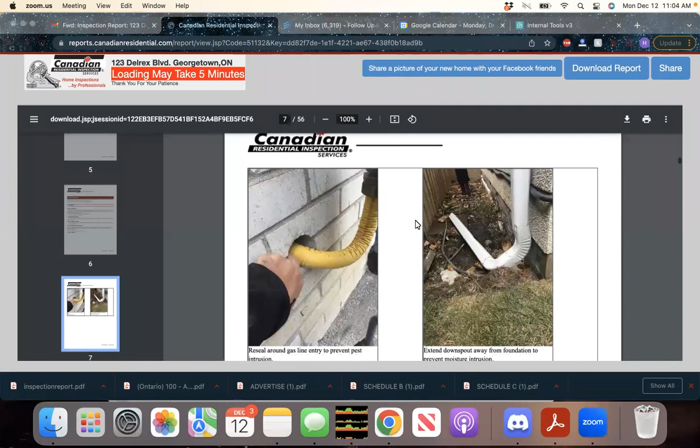Yeah, that makes sense. And also you have a note here about the surface drainage. So I guess there was a grading issue with this one where water was kind of coming back towards the exterior foundation walls. Yeah, I think on that one it was the back of the house that had a bit of a slope towards the house. We make that note because ideally in a perfect world, we'd like to see the grading slope a quarter inch per foot for the first 6 feet away from the house, and that's just going to prevent any water from pooling there. So we don't want any water to come in the basement. I'm sure nobody does, but that's the easy fix.

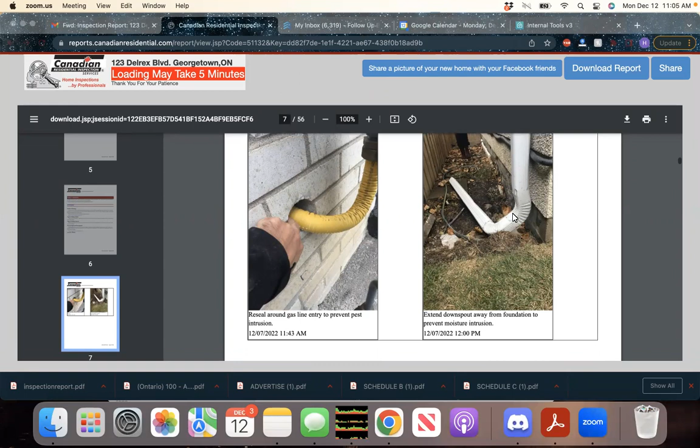It's just to regrade. And if you wanted to do a next level of protection for the basement, is there any waterproofing methods you would recommend for the foundation wall, anything from the exterior? Depending on the age of the house, there's a good chance there's already been some waterproofing done, but on older houses like this one, there was no exterior waterproofing. So you could do like a waterproof membrane, which is like a foundation wrap. You'll see it's got dimples in it, and that will essentially guard the foundation from chronic dampness and any sort of water pooling next to the foundation. Exactly, that's exactly it. So it just avoids water being absorbed into the concrete because it's porous, and it getting released into the actual basement as moisture or actual water that comes through. Right, hairline cracks are fairly normal in Canadian conditions.

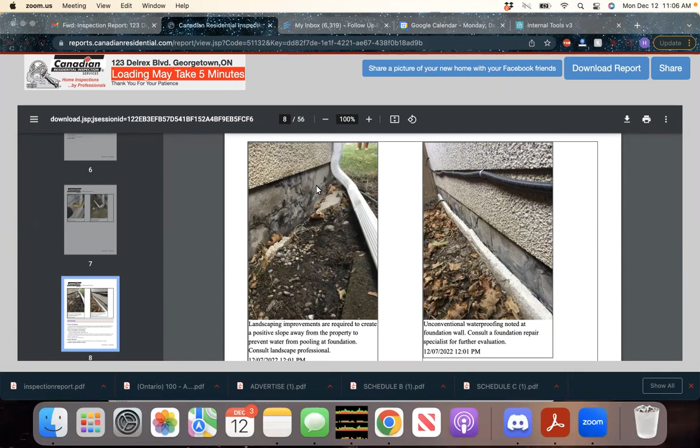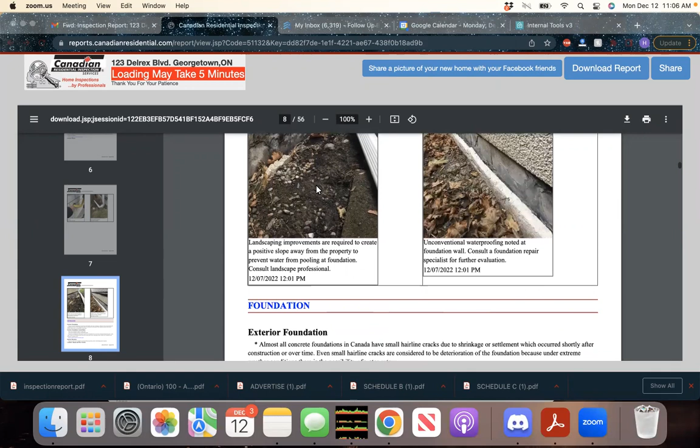But if they get too thick, there's a process called parging. Is that right, that you can use to reseal some of the hairline cracks? Absolutely. If it's just a small hairline crack, we've seen it where even small hairline cracks will allow for moisture intrusion. You're better off just sealing them up, because it gets to a certain point where you're going to have to consider doing an epoxy injection, which can be quite expensive.

Definitely. And the epoxy injection, can that be done at either side of the foundation, both on the interior and exterior, or is it just from the inside that they do it? Because I've always seen it from the inside. Yeah, it's predominantly done on the inside.

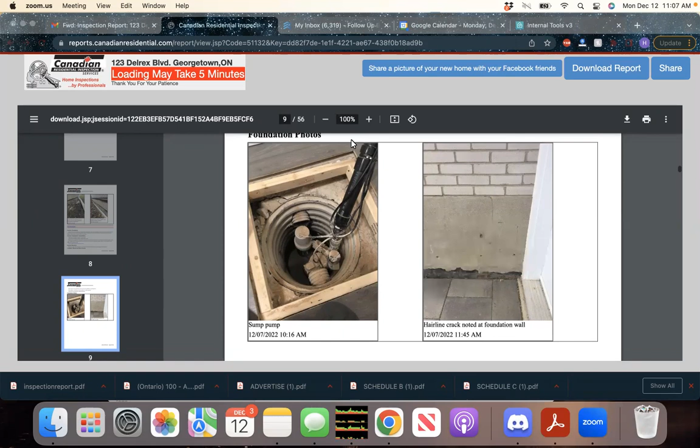They can get quite expensive, anywhere from about $500 to $3,000. It really depends on the warranty, how long it's been there, how much water is currently allowing in, and so forth. That's definitely right.

So this is the example of the hairline crack we're talking about, guys. If you do parging on this, you can see at the bottom here it's all been deteriorated. If you do new parging, this will help seal it, and that definitely has to be done every 5+ years, because weather conditions really deteriorate it fairly quickly.

Now, a couple of quick questions about the injection. Is it silicone that they inject with? What is that product they use? No, it's epoxy, which is the product. Okay, so it's epoxy, basically like a glue? It's designed specifically for concrete, and it binds it together. It's not supposed to fail, but I've seen a number of cases where it does fail, and that's where it's imperative that we have that warranty so that we can go back on the guy who did it and they can redo it.

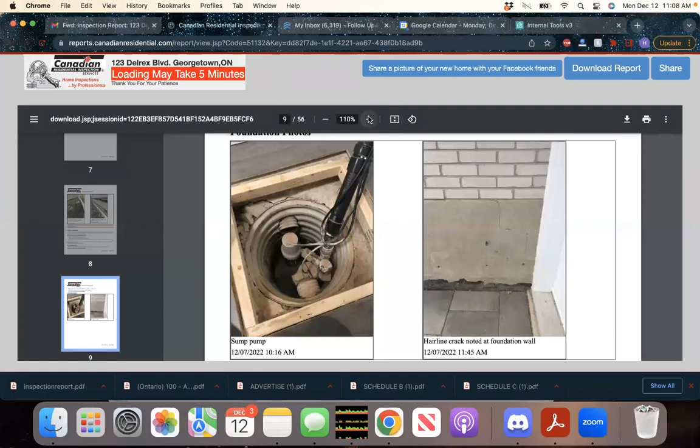That makes sense. And just a typical cost, like when you see 3 or 4 injection points in one of the cracks, what is that roughly costing a homeowner to get done? Yeah, so like I was saying, it could be anywhere from $500 up to, I've seen up to $3,000. In terms of warranty, you can get one with no warranty, or a 5-year, 10-year, 15-year, or lifetime warranty. So the more warranty coverage we have on it, it's typically more expensive.

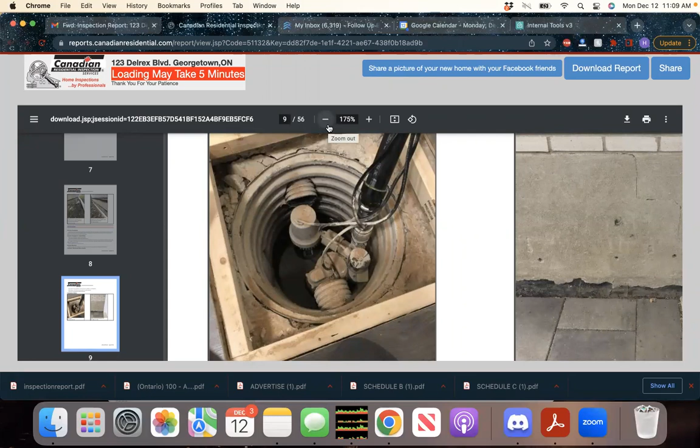Gotcha, understood. Now we've got a picture of the sump pump up here as well. For a lot of people on the call that may not know what a sump pump is, take us through what this is exactly going to be doing for the foundation. So any water that collects near the foundation is going to be sucked out and hopefully exhausted away from the house. A lot of the times we'll see it discharging right next to the foundation, which really doesn't do us any favors, because what happens in that case is we end up short cycling the sump pump.

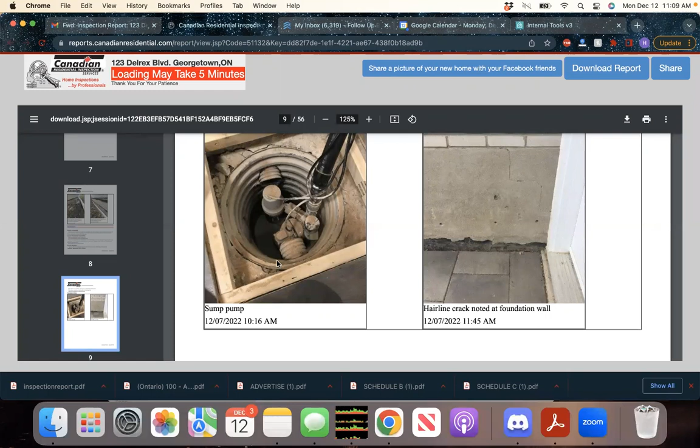So we have water that collects near the foundation. If we're taking that water and dumping it right next to the foundation, it's just going to cycle back into the sump pump and it's going to continuously run. But the idea of the sump pump is to get the water out that's collected around that foundation. So what I would suggest, if any of you see that, just let your client know that they should have an extension, ideally 6 to 8 feet away from the house, and that's going to prevent that water from pooling there.

Fantastic. And can you add a sump pump to any foundation, any property, or does it have to be roughed in when the house was being built? No. So again, with sump pumps, if you do see one in a house, it's not necessarily a bad thing. But if we see it in an older property, there's a good chance that there's a sump pump there because there was an issue in the past. People aren't putting them in just for fun.

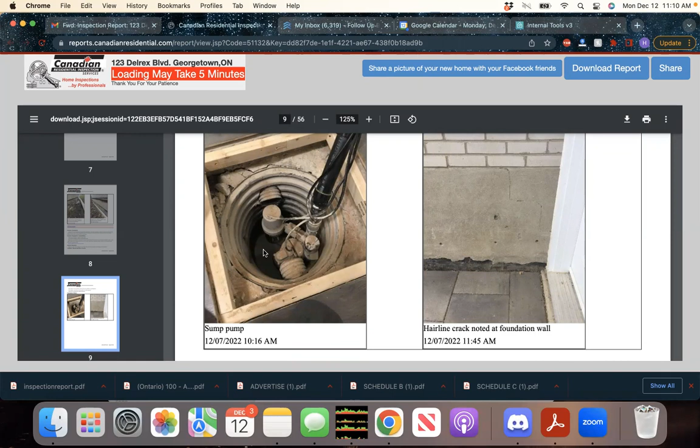So it's great that we have it there. It's one of the only lines of defense that we have against moisture intrusion in the basement. And it's a lot cheaper than wrapping the foundation in foundation wrap, doing the digging and all that kind of stuff.

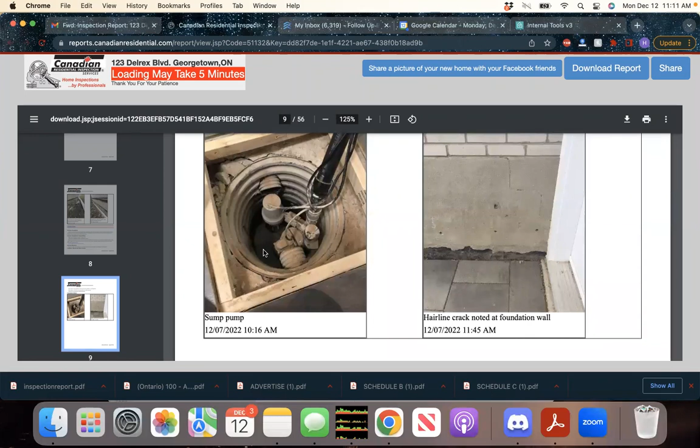So a lot of people opt into the sump pump versus doing a complete waterproofing of the basement. Gotcha, but if you did them both, it's like an extra layer of defense, right? Exactly. It adds a lot of value. A lot of people don't see that, but I think it's something that pretty much every house should have.

These things tend to happen when you're on vacation and you come back to a flooded basement. If we would have had a sump pump, there's a really good chance that we wouldn't have to worry about that kind of thing. I think it should be code, to be honest.

I agree with you, and I always tell the buyers or any homeowners, the foundation is the most important part of the house. You're gonna make all that investment onto that lower level, the basement, doing basement apartments, kitchens, bathrooms, and everything. And if it floods, you're really out quite a bit. Even if the insurance does cover it, it takes forever to get the work done again. It's just a big headache and a big distraction. So get this work done as soon as possible.

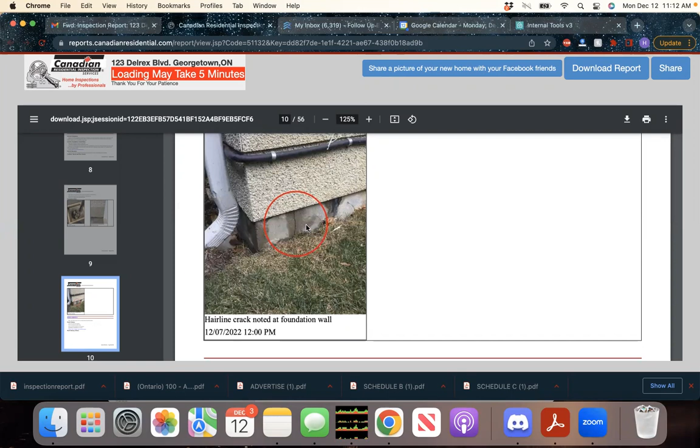I think it's one of the best investments you can do into the property is getting that waterproofing done and out of the way. And it's going to be fairly bulletproof moving forward.

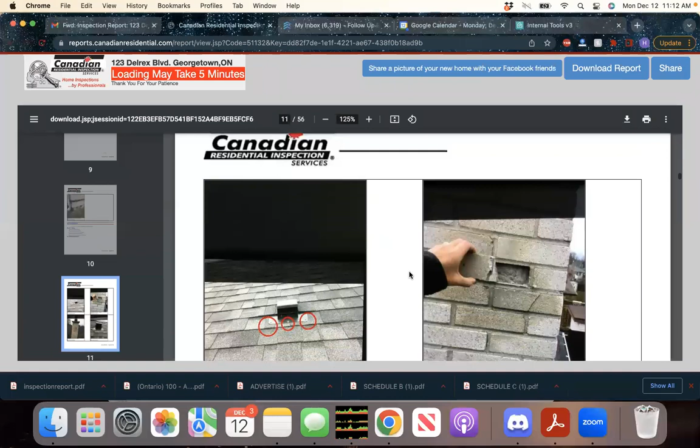Now, with the chimney here, I remember you were on the roof on this one and you had literally pulled out one of the bricks, held it in your hand. I remember that. Yeah, this was the picture right here. So you pulled out one of the bricks. So why is it important that the masonry work is intact on a chimney?

Well, we want to prevent any moisture intrusion from getting in there. That's the primary reason. Secondly, the more it chips off, the greater chance that we have of that chimney falling onto somebody in a storm or that kind of thing.

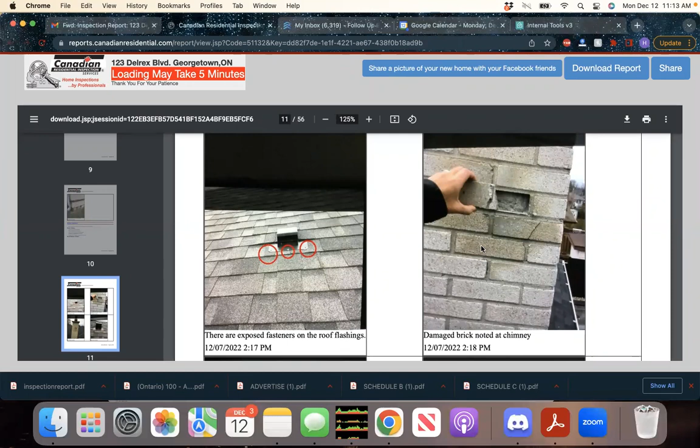Definitely. And you made a good point when you were actually talking about it and explaining it to us. You said even if there was a leak in the actual brick and mortar here, the gases coming through the chimney aren't going to actually leak out because there's another container inside there. Is that right, you were mentioning? In this case, there is, because if you look, do we have another shot of this?

Yeah, you see this one with the circle on it to the left. If you notice the top of the chimney, it's crowned off with a B vent. So that B vent is inside of that flue that you see at the top there. So there's no water that can get into that pipe. And that's not going to affect, in this case, the hot water tank.

Gotcha. Now, if it was like a fireplace, for example, that'd be a different story. It could eat at—they have clay chimney liners inside, and once the moisture gets into there and cracks the chimney liner, that's a very expensive repair. Chimney liners can be anywhere from $10,000 to $20,000 to repair.

Gotcha, makes sense. And you had mentioned the actual fasteners that they had put down on these vents on the roof—what was missing on them? There was some sort of fastener missing, I guess. So the fasteners are there, you can see the nail heads, but there was some sort of epoxy or sealant you add on top. So there's a roof sealant that you can put on top of these that prevents the nails from corroding out.

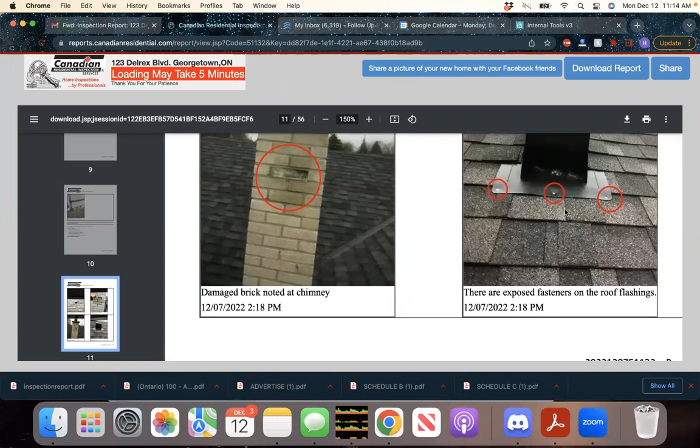And that's so basically for code purposes, everything needs to be sealed. Any penetration on a roof requires sealant.

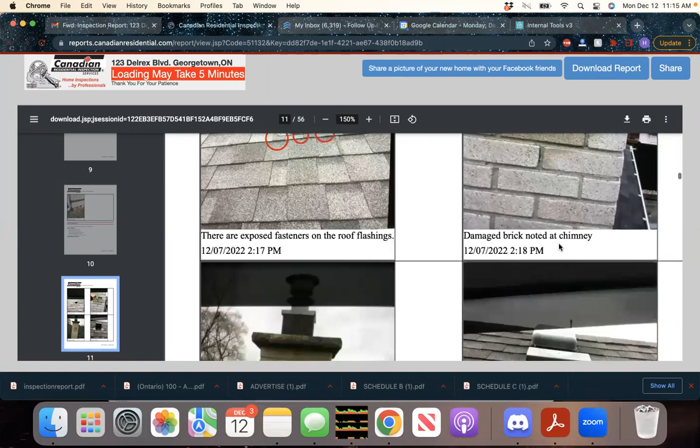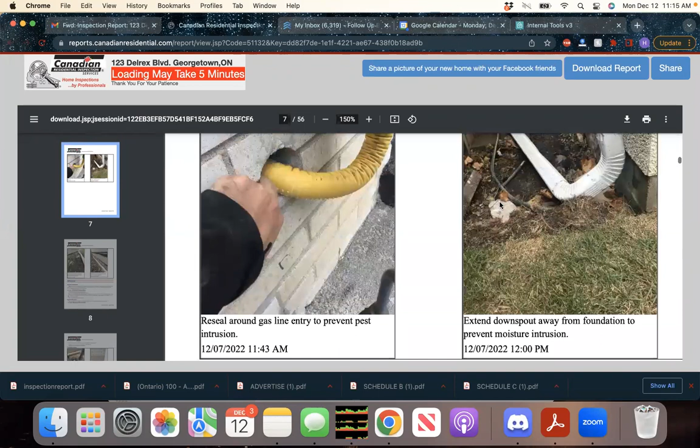Gotcha, makes sense. And there was another picture I passed by earlier that was quite interesting. Hold on, where was it? One second here—I think it was a gas line. So this was the gas line going into the house that had a major hole in it as well. So you recommend epoxying this up or silicone, or how do you fill in this size of gap here?

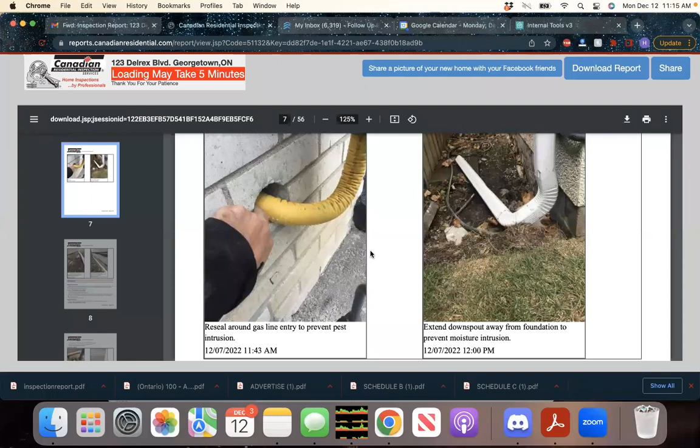So the easiest way to do it would be to spray foam around, and then you would do the silicone, or you can get a flexible sealant that they make specifically for brick. Gotcha, makes sense. So this avoids pretty much rodents, insects, water from getting in there, right?

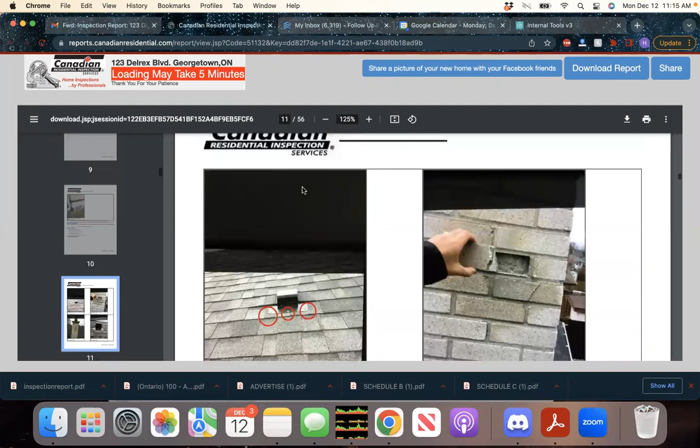Well, you remember that one went directly up into the attic. So that was just an easy way for mice to get into the attic. That's right, that's exactly right. So you can see more of the fasteners need to be sealed here.

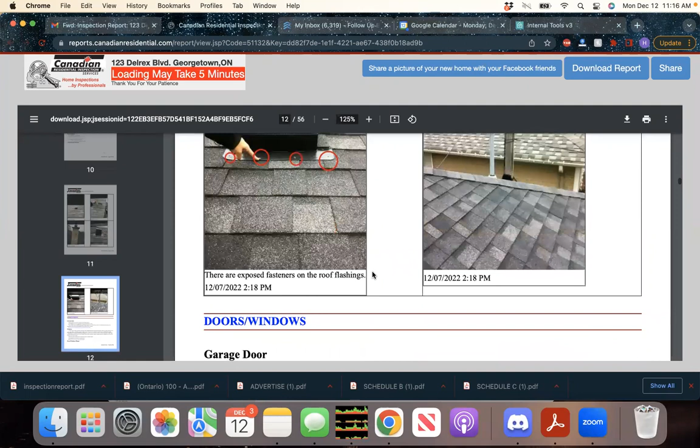Okay, fair enough. Let's see what else we got here.

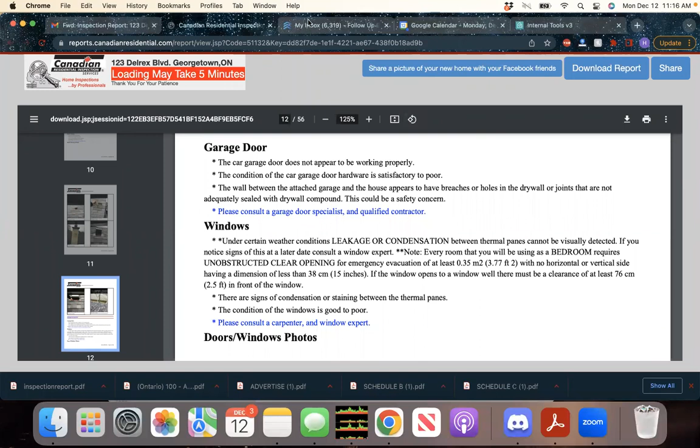I remember there was an issue with the garage door sensors as well, they weren't lining up. That was just a simple fix—the right side photoelectric sensor wasn't properly secured. So in order for that to work, we had your client hold it in place while we could get it to open and close properly. It was just a matter of taking the stand it was connected to and tightening the bolt on it. It was a fairly easy one for sure.

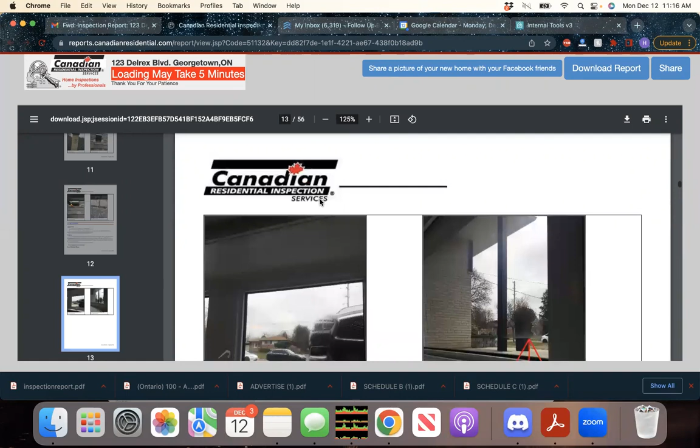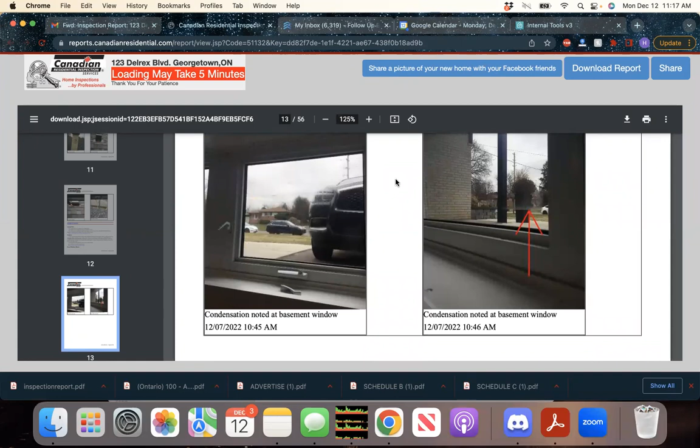But this next one was a bigger issue where the window had condensation between the panes of glass. There's a number of reasons this happens. One is just age of the window—the typical service life is about 20, 25 years. Once we get to that point, there's a good chance the seals, over time from UV exposure, get brittle and eventually open up. There's also excessive humidity inside the house that gravitates towards the windows, hot meets cold, it condenses, and that moisture eventually eats at that seal as well.

I've seen a number of cases where I'd say 90% of people have fallen in love with California shutters, and we tend to keep those closed because we don't want anybody looking in. We forget that when we close them, we trap the warm, moist air in the wintertime next to that window, and of course it's cold outside. So we're trapping warm, moist air inside, and it condensates right between the California shutter and the window, which accelerates deterioration of that seal. That's a good point, I never thought of that—that actually makes perfect sense. California shutters are very popular, and they're super thick too, so when you close it, it creates like a heater in there.

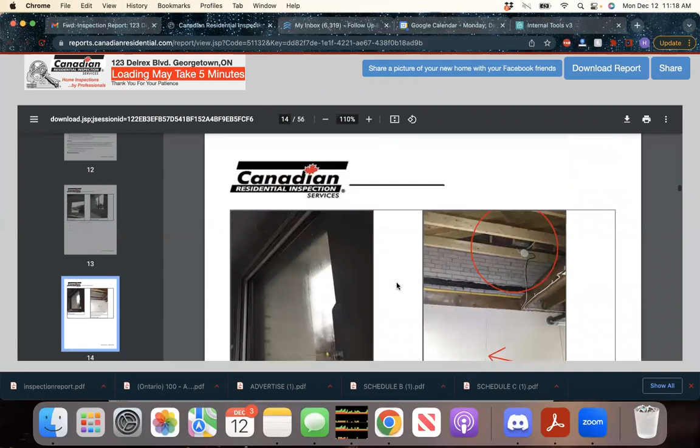You mentioned typically fixing the gasket, filling it with argon gas—it was about $500 per window. Basically it's 50% of whatever the cost of a new window is, so depending on the window and size, it's usually about half price. So as long as your client is okay with the window style itself, it's not really necessary to get a new window. But you're not going to want to throw energy out the window either, so you'd replace the seal and save your money.

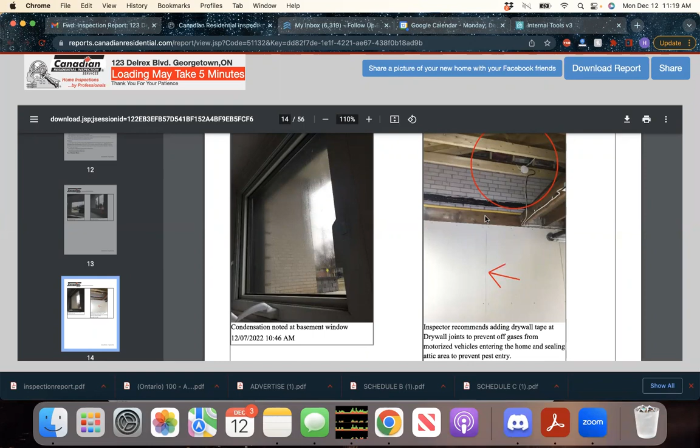This note here, from inside the garage, shows there was an opening right into the attic to the main house, which is a big no-no. Items can get in, and you lose a lot of cooling and heating that may end up going in there as well. The drywall here wasn't mudded, so the best thing to do is seal it off completely. We don't want any pests getting in there, and we definitely don't want potential gases from vehicles running, like a car producing carbon monoxide, getting inside the house.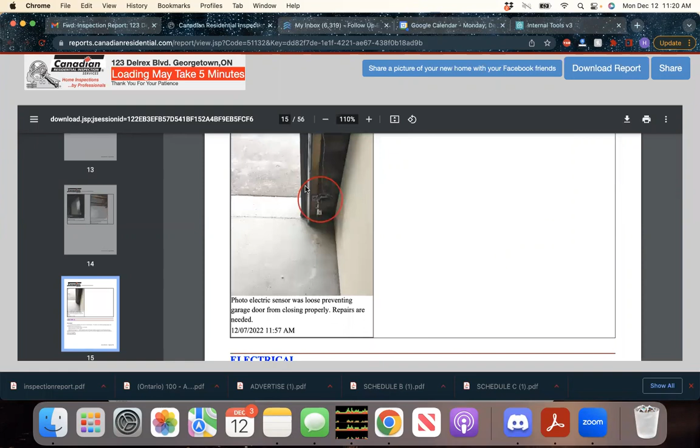And this was that sensor we were talking about that wasn't lined up in the garage. All right, let's keep the ball rolling.

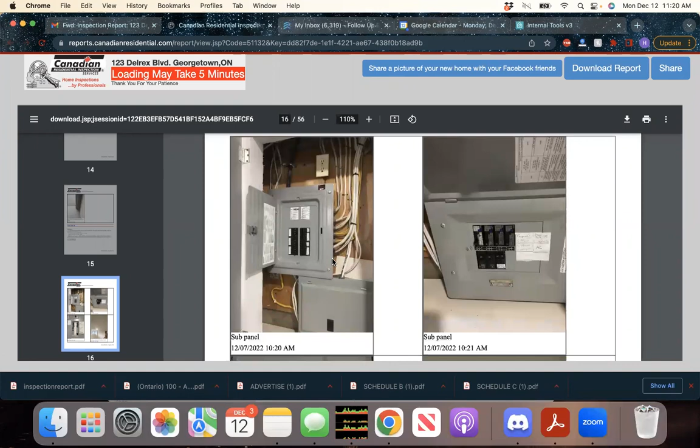This particular house had a main panel and a couple of sub panels. I think there was an in-ground pool, some appliances on the basement level, and the main kitchen upstairs. Everything looked fairly good to you on this one—copper wiring is visible here. Anything you want to note on this?

No, everything looked okay. The panels were okay.

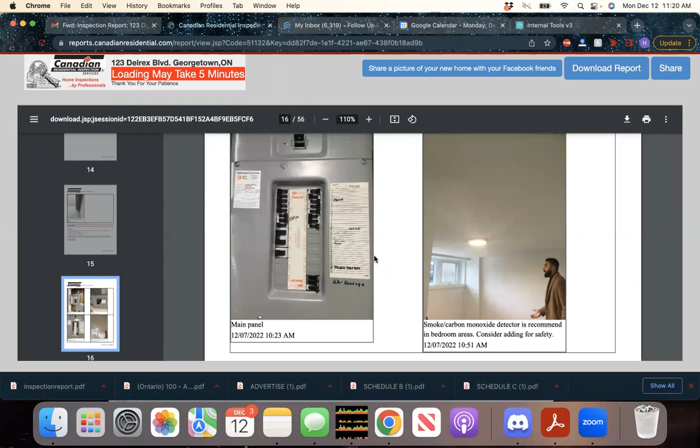There's a picture of Ash—your boy here, Ash. I was making a point of something here.

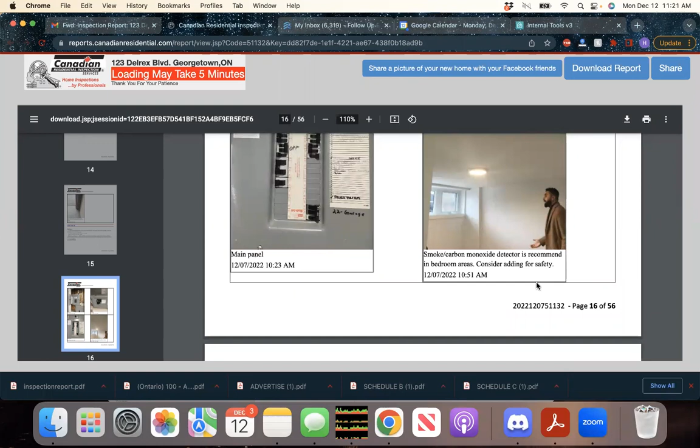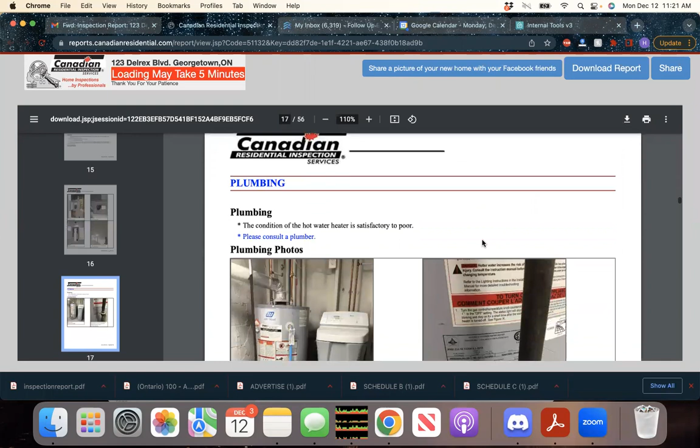Carbon monoxide detectors, make sure they're in each room in the basement level, very important. Now, of course, that is modern standard and it's just a recommendation for this house. But if we were to enter a home that was 2015 or newer, every bedroom requires a smoke detector / carbon monoxide detector. Perfect, keeping the ball rolling.

This is your water softener. This particular one wasn't working very well on that day. I think the salt was a little bit too low is what it was saying, and it was unplugged, so we couldn't fully check it.

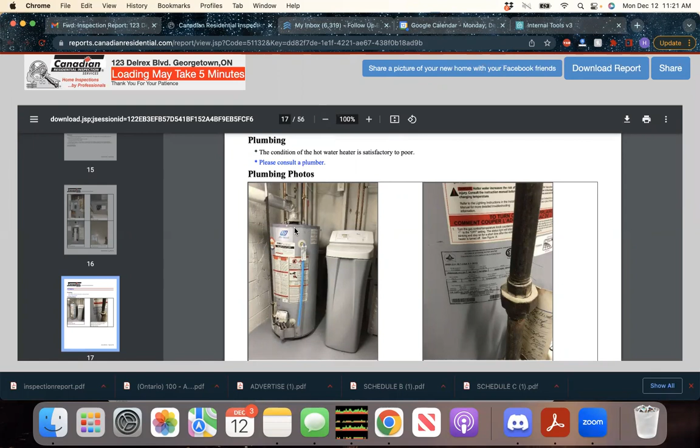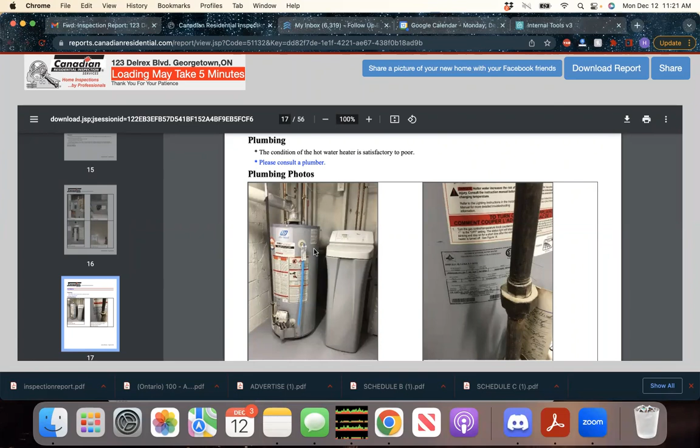With the hot water tank, you were mentioning there was a piece missing out here that can potentially return carbon monoxide gas back into the house. What was the name of that piece? Forget what it was. So the thing we're looking for is typically found on newer tanks. Do you remember the age on this tank? It was an older one, 2014.

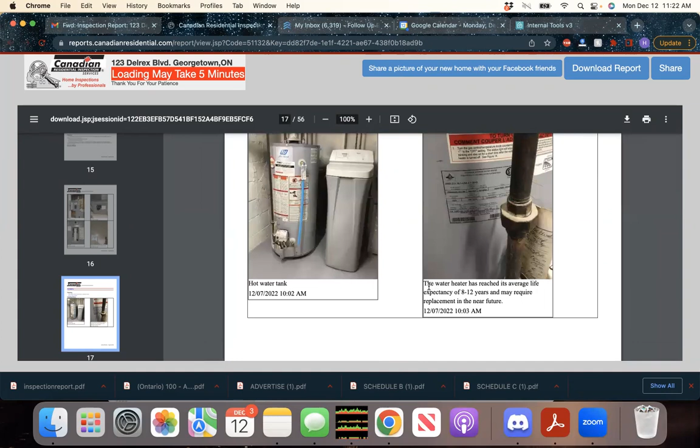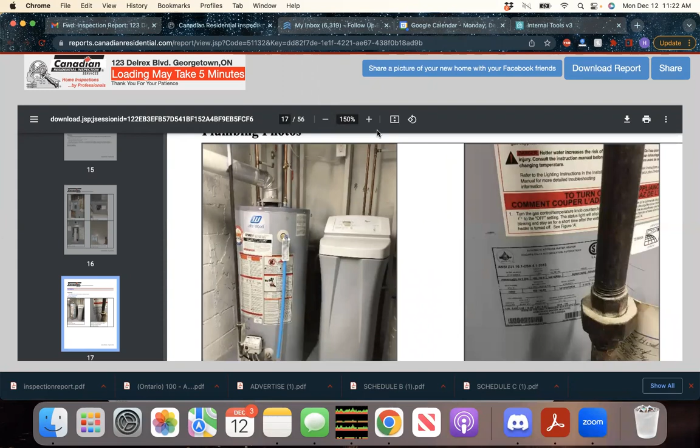In 2020, we required power vents to be installed. A power vent is that black piece you'll see on the top. Yep, right there. It basically prevents any backdrafting. So it's going to force any carbon monoxide out of that B vent, that metal pipe going outside, and prevent carbon monoxide gases from slipping through that gap into the house.

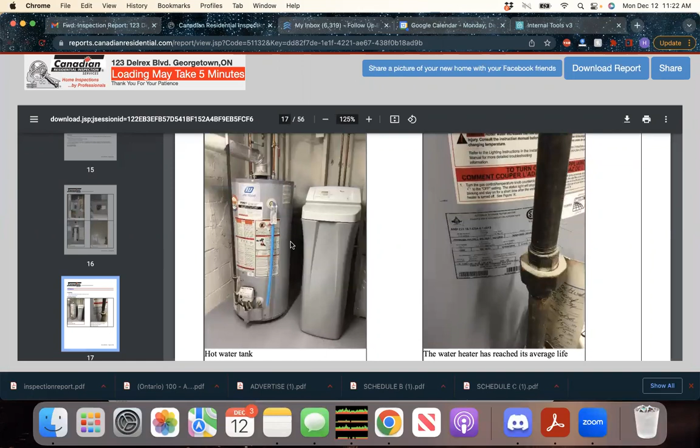That's an important one. You mentioned there was also another piece missing, like if the water gets really hot, it doesn't burn you. Yeah, it's primarily for child safety, but it's an anti-scald device that connects the hot and cold line. The idea is to mix a little bit of cold water into the hot line. So let's say you're doing the dishes and your son comes in from behind and turns on the hot water - that's going to shoot a bit of cold water into the tap to prevent your child from getting scalded on the hand.

Makes perfect sense. Typical life expectancy on these ones is 8 to 12 years. Replacement cost can be around $2 to $3 grand for these hot water tanks.

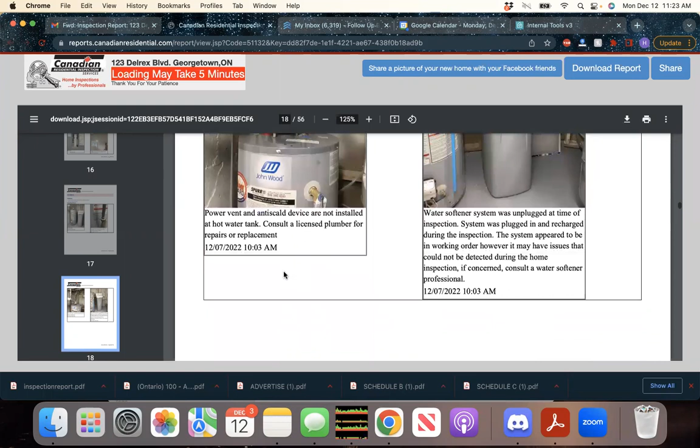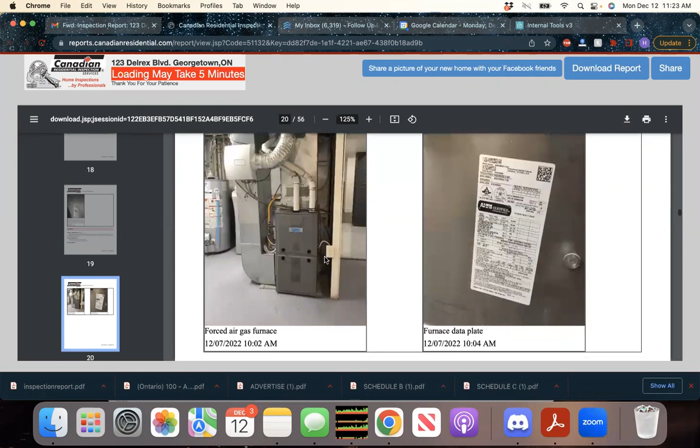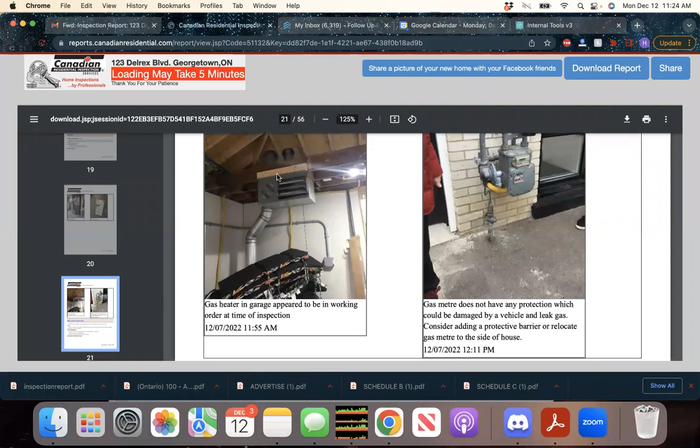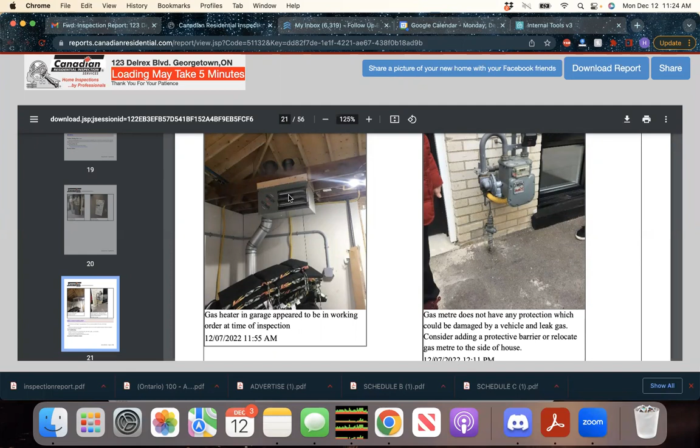There was another little heater in the garage. What are the life expectancies of these kind of devices? They could actually last a lot longer because they don't get a lot of usage most of the time, but I've seen them last like 20, 25 years. This was to heat up the garage.

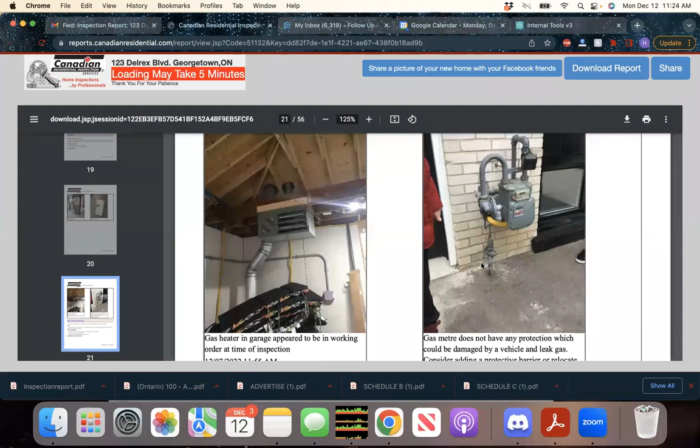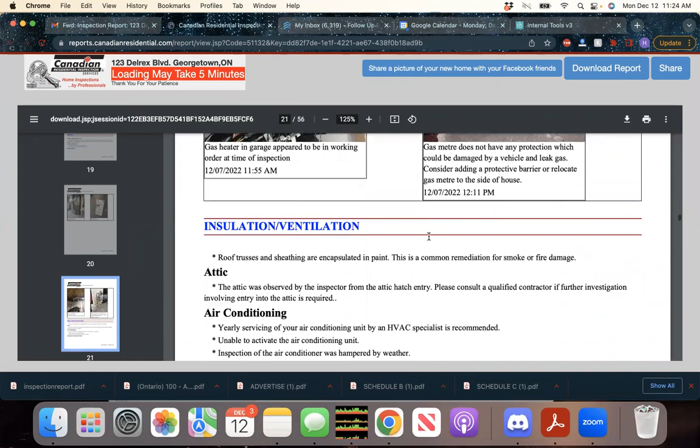We also made a note that this is right at the front of the house - this is your main gas line. You want to put a little pillar or metal post to prevent any sort of accident, a vehicle ramming into the house. Yeah, especially in the winter when you're sliding into your driveway. Exactly, that's a good point for sure.

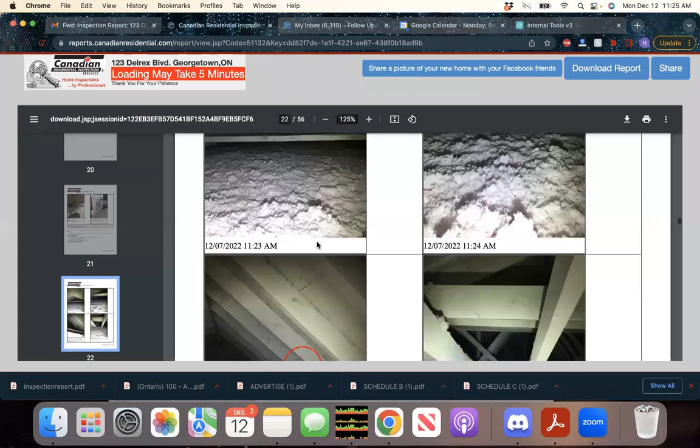We actually managed to get you in the attic on that day. Yeah, we got you in there - an R60 rating, which you were very happy with. Is that the standard R60 in the industry? Definitely not the standard, it is now the new standard.

It's rare to find in any house older than 2020. So the fact that we saw it in this house, which was I believe 1950s, it's pretty rare to find. So yeah, I was definitely happy with the level of insulation here.

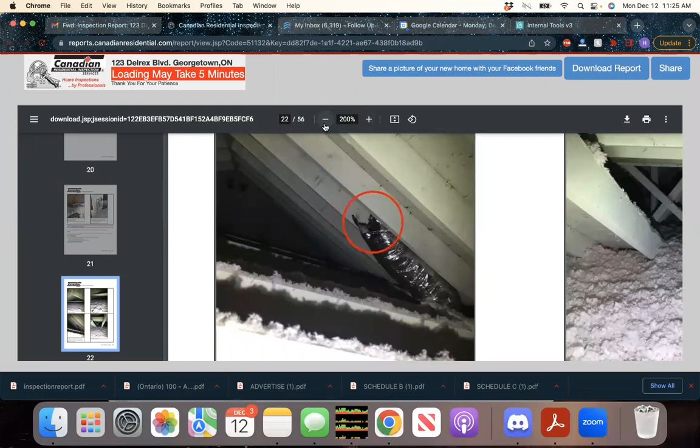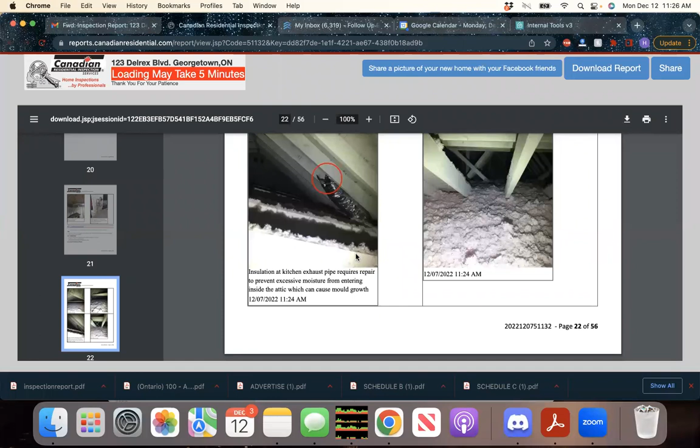The only thing I wasn't happy with was that the insulation around that pipe had fallen off, which is a potential source for mold inside the attic during winter months, as it can create condensation when hot meets cold, because the air coming out of that pipe is warm, moist air from the bathroom. Or actually, this is even worse - it was in the kitchen, right? So we're boiling a lot of water, stuff like that, and that's going right into the attic. Easy fix, but definitely a good catch.

Yeah, that was a good one. AC was also from 2020. I know the client was a little bit concerned about the size for the house. What was your take on that - do you think this size would be sufficient for this bungalow? It was about 1,500 square feet inside, so I figured it would. It was a 24,000 BTU, which would equal about 2 to 2.5 tons.

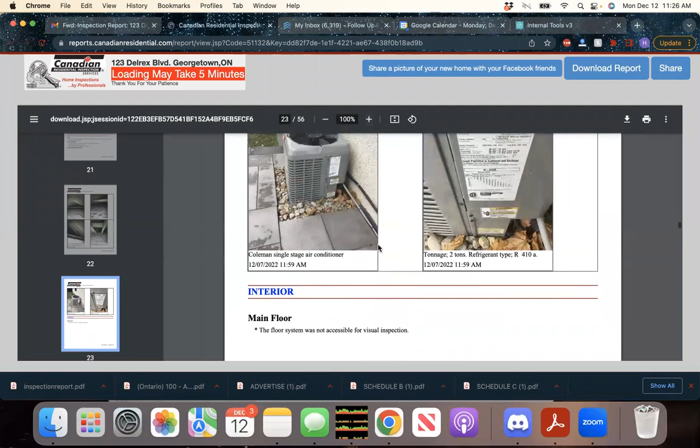That's an adequate amount. You don't want to go too big, because then you can end up with just a mess inside for air quality. So that was a good size.

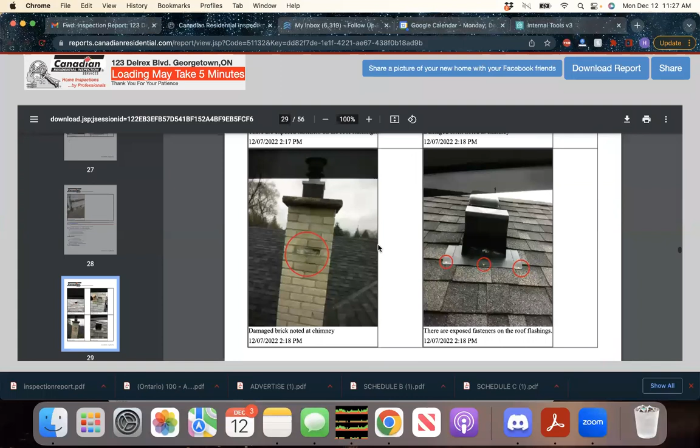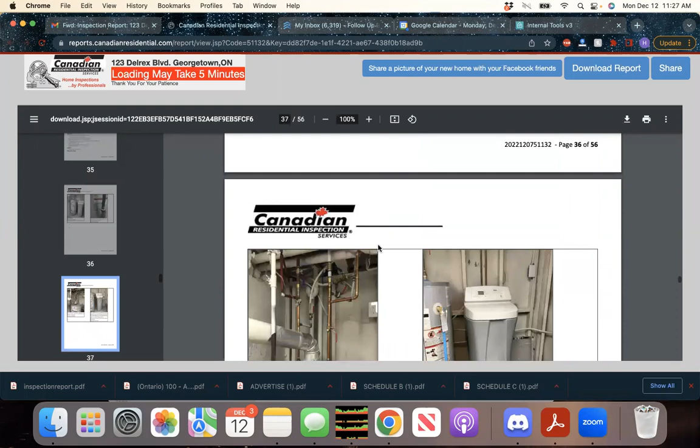No, that definitely makes sense. Let's see what else we got. This is just the full report, you're not going to find any additional items in here. The reason why it does that is because you have the summary and the full report. You can share the summary with whoever you want, and it won't provide that person with the full report, they'll just get the summary of things. The full report, you get all these pictures, plus you get all the questions at the bottom, which you'll see here.

Fantastic. So overall, the house definitely did show well. A lot of the key items were done. There was a lot of little items that annoyed this particular seller, but we managed to kind of power through.

And get things done. Now, Tony does provide another service for you guys as well. If you are in a situation in a bind where maybe there's not enough time for an inspection to get done, and you need him to join you during the showing and walkthrough, he does offer that from time to time, not always, but if it is possible, he will, of course, charge you for it. But what does that look like, and is that something you still are doing these days, Tony?

So I always offer it. 9 times out of 10, it always turns into a full inspection anyway, at least now because the market's a bit softer. Whereas before, when the market's really tight, there's a very small chance that we're going to get an inspection in and be able to negotiate based on a home inspection. So a lot of the times when it's like that, a lot of people just want to know what they're getting, they're not overly concerned. They just want to make sure they're not buying something that's going to fall apart or have any major concerns. So I definitely offer a walkthrough that provides them with enough detail that they can make an educated decision, and if they have to overspend, they're willing to do that at that point.